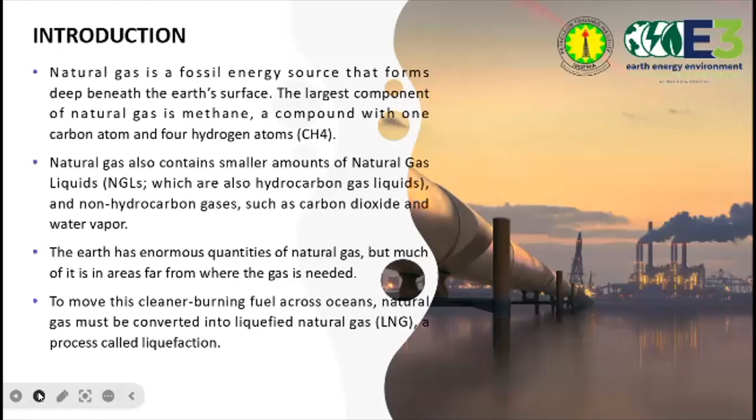Due to the current energy transition, natural gas has become a suitable or a reliable fossil fuel that can enable to drive the energy transition. I'll be talking about the exploration for natural gas.

Hydrocarbon exploration involves different methods, either using the geophysical method or the geological method. Each method gives you different characteristics of your Earth's subsurface, but it gives you an understanding of the different characteristics of your subsurface. These different forms can aid to gain an understanding of the different formations that occur at the subsurface and the different sedimentary layers found in your subsurface.

Hydrocarbon fuel, your crude oil, and your natural gas are formed as a result of dead, decayed organisms. These dead, decayed organisms are buried a longer period of time, millions of years, due to high sedimentation or high deposition of sediment, and as a result of pressure buildup and temperature buildup. With an increased temperature and an increased pressure, this dead organism turns into your hydrocarbon, known as your oil or your gas.

Once prospecting is carried out, an exploration followed. The next is your drilling. Drilling is a process of excavating or a process of providing a wellbore for the extraction of your hydrocarbon from the subsurface to the surface for production and for energy provision to energy demand.

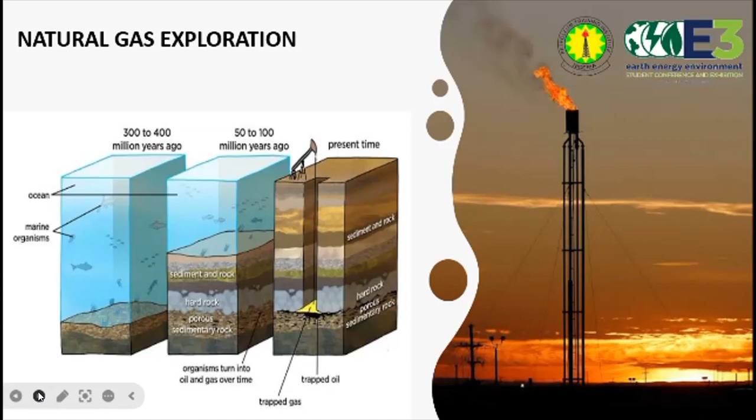We have different forms of natural gas. We have the LPG, the LNG, the CNG, and the FLNG. The LPG, which is made up of purely propane gas and your butane gas, is used for domestic activities, such as your cooking and warming of homes. Your LPG is made up of your C3 and your C4.

Moving on to the next one, which is LNG. LNG is liquefied natural gas. What it means is that your natural gas that comes out in a gaseous form is being liquefied for easy transportation to market availability. Your LNG is made up of purely methane gas, which is your C1 or your CH4.

The next one is CNG. CNG is compressed natural gas. This gas is a unique gas in which gas is compressed to less than 1% of the volume it occupies at standard atmospheric temperature.

The thing about this CNG is that it's also a pure methane gas. But your CNG is used commonly for powering vehicles or for commercial activities or commercial operations.

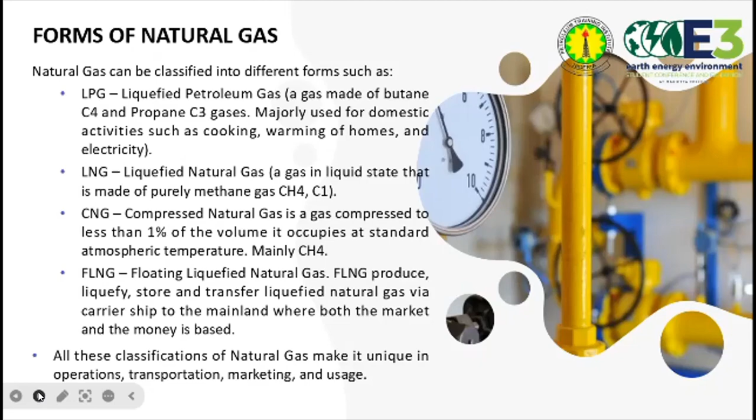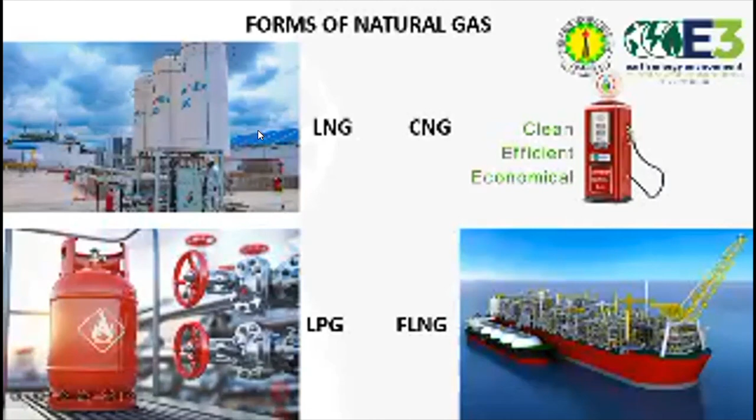Now I want to take you through the production of LNG. Recall, I said LNG is your liquefied natural gas that is made up of purely methane. But there are some acid gases which are non-hydrocarbon gases, such as your CO2, your H2S, your SO2, and sometimes your sulfur. There are some other compounds or chemical elements that could come alongside your natural gas, which is your mercury. These gases are termed as your acid gases.

The reason they are called acid gases is because they can degrade the value of your LNG. They can also lead to corrosion in your pipelines for transportation. These acid gases are removed during the process of liquefaction of your natural gas. The reason why you also remove them is to improve the quality of your liquefied natural gas and to also meet market demand.

LNG production involves a series of operations that help to reduce the effect of unwanted materials. An example of the unwanted materials are your acid gases. I will take you through the units of the LNG processing plant because my course of discussion today is LNG. Your LNG processing plant is made up of different units. We have the feed gas system, whereby you receive your natural gas from your natural gas wells.

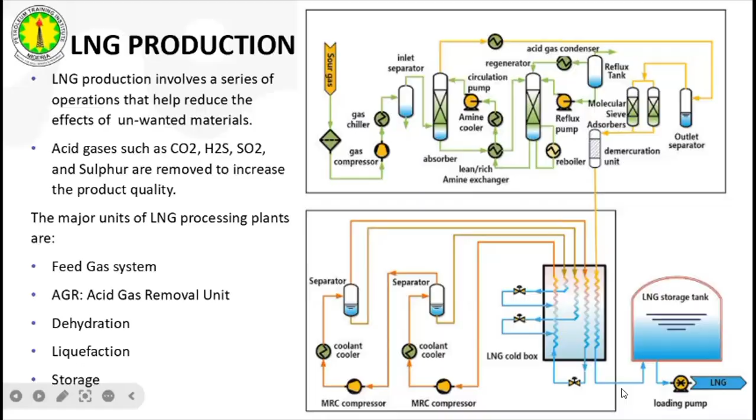Once your natural gas is liquefied to a liquid, it leaves your liquefaction unit, known as your LNG cold box, to your LNG storage tank. Then you can now distribute your LNG to different customers to meet up market demand and energy demand. That is the general overview of your LNG production. So for your LNG production, we remove our water because we don't want any form of clogging or any form of hydrate formation at our LNG cold box or liquefaction unit. Once your LNG production is carried out, you can meet energy demand or market demand.

I would love to discuss some roles of natural gas in this energy transition. Energy transition involves the shift from a carbon emissive fuel to a lower carbon emissive fuel, or from fossil fuel to renewable energy. But in the course of my discussion, I would love to say that the cleanest form of fossil fuel, which is your natural gas, is often a major driver in this energy transition. And why is it a major driver? It is because it has a lower carbon content compared to your crude oil or your coal.

What then are the roles of your natural gas? Your natural gas, being a driver of the energy transition, can aid in ensuring energy security. It can also help in fuel decarbonization. When we talk of fuel decarbonization, it's the process of removing or reducing the impact of carbon in our climate.

Your energy transition, also driven by natural gas, can bring about energy entrepreneurship, where young engineers, young professionals, young geoscientists or earth scientists can go into energy entrepreneurship, whereby they can provide energy on a small scale, meeting up market demand and also energy demand. This also can encourage the reduction of energy poverty.

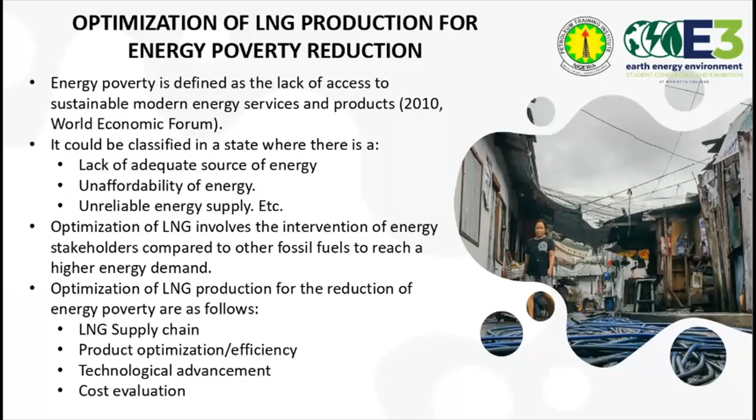Technological advancement. Once technological advancement is involved in the production of LNG, optimization is enhanced and production of energy is on a faster level. Cost evaluation. The cost of production of energy can affect the affordability of energy. So once the cost evaluation is optimized, people can afford this energy at a lower cost. Hence, LNG production can help to reduce energy poverty once it is being optimized.

In conclusion, the different forms of natural gas function with different goals of optimization. And this is to improve human activities, to improve the manufacturing industry, to improve the energy generation industry, such as the electrical companies. Some uses of natural gas are residential: cooking, heating up homes, generating electricity. On a commercial basis, natural gas can be used for heating, generating electricity, and for the manufacturing industry.

Economically, natural gas can generate revenue. What about transportation? Your CNG, which is compressed natural gas, can be used to fuel commercial vehicles, thereby contributing to the net zero goal. Natural gas, being a less carbon-emissive fossil fuel, has a tangible role in providing energy by reducing the level of energy poverty and increasing sustainability. And this in return contributes to the United Nations Sustainable Development Goals.

LNG is transported using various means. Once your liquefied natural gas is produced into liquid, it is taken to regasification stations where it is converted back to gas for transportation through pipelines to meet market demand. In conclusion, this energy, known as natural gas energy or natural gas fuel, is a key driver in this energy transition.